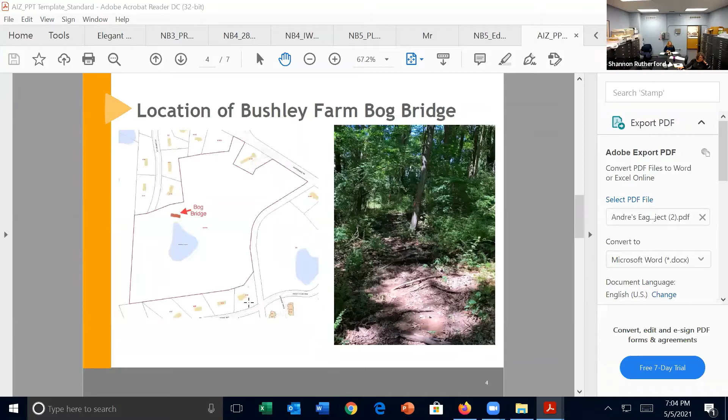That's okay. The design of the bog bridge will consist of two 2 by 12 by 12 feet long rough sawn oak planks sitting on 4 by 6 by 4 sleepers. We will be anchoring the sleepers with a rebar to prevent them from moving. The rough sawn oak may be replaced by white oak, depending on accessibility.

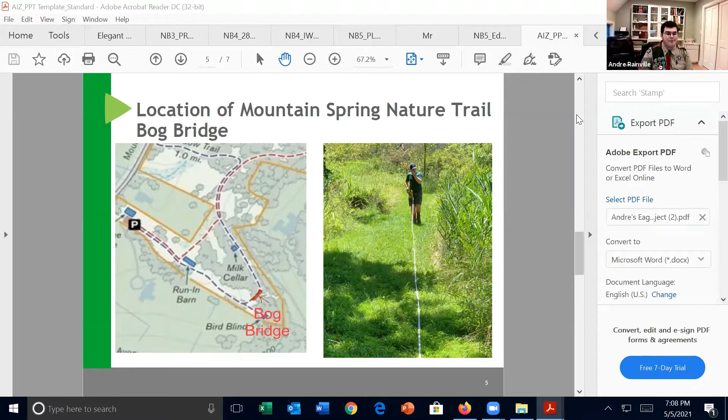Okay, Shannon, number 2, I guess, has been withdrawn. So the whole application was withdrawn? Correct. Mr. Van Voorhees is going to think about this a little more to determine what direction he really wants to go with this. And then we'll likely see him back at some point. Okay, but he has formally withdrawn. Yes, I have it in an email from him. Yep. Okay, good, thank you.

Next up, Newport Realty Group LLC, 8677 Plainville Avenue. Good evening, Mr. Chair, members of the commission. I'm Christian Hoeb on behalf of the applicant Newport Realty Group. With me this evening are Mark Lovley and Anthony Valenti, who are the principals of the applicant. Also with me are Andrew Quirk and David Lord. You'll recall that this application was accepted April 21st. Our site walk was completed just this weekend on May 1st.

Staff was incredible in requesting information back, and Andrew Quirk responded to those engineering comments of the 30th, and he's prepared further responses and answers to provide the commission with more information. So in a moment, I'm going to turn it over to Andrew Quirk, and then I presume the commission will have questions. So without any further ado, Andrew, are you there? I am. Andrew Quirk, professional engineer with Kratzert, Jones and Associates, for the record.

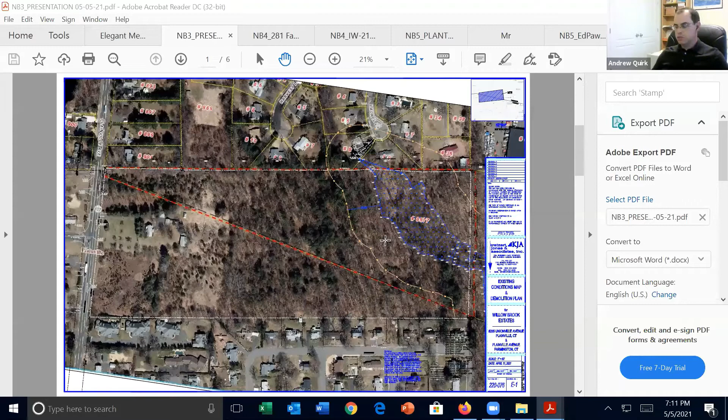to the crossing. And Shannon, maybe if we could switch to the second sheet, I think that shows the development. So that same line where we came down along the rear of those units, and we followed the berm of the detention basin. And then if we could zoom in there, Shannon, if that's possible, in that southeast corner where it overlays the contours and the open space area.

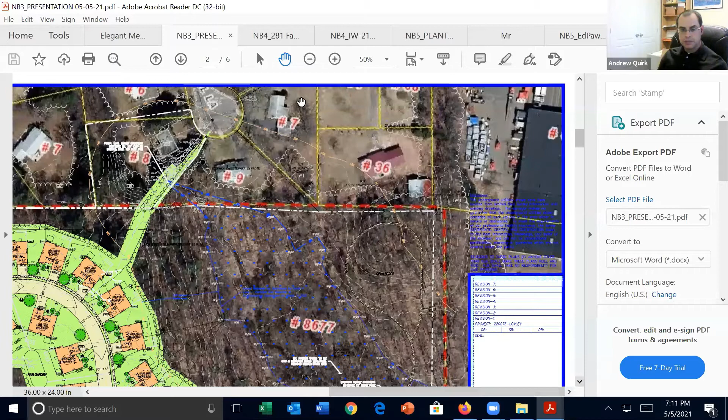I think this shows pretty well where previously we were coming directly from the detention basin going straight east. We were up near the spillway in that area. We were going straight or northeast, and we were going right down the contours in that steeper area. And instead, we're going to follow the berm and go around that knoll, following those gentle grades down to the crossing.

I think that's going to be a much better location, and that was due to the comments by Bruce here about the grades, and I think this is going to be a lot better this way. And then at the crossing, we did add to the plan some notes based on feedback that we received from the site walk at the crossing.

Unfortunately, the color doesn't show up too well on the screen, but it indicates what we discussed in the field, where we would install a 12-inch HDPE high-density polyethylene pipe, or it could be light and brought down there, and either with hand tools or small equipment like a bobcat or a mini excavator, just try to lift those

brownstones enough to slide the 12-inch pipe through, and then rest the brownstones back, and that would ensure that the flow underneath that land bridge continues should there be an issue with the brownstones, or to prevent an issue with the brownstones collapsing. Also, there were some comments about some of the debris up gradient from that crossing, some fallen trees and things that could obstruct flow.

So same thing there, we would remove the debris from the site, and anything that would obstruct the flow, some of those trees, at least move those to the side away from the flow pattern so that they don't obstruct the flow. That's the summary I have from the site walk. We did try to address many of the engineering and planning comments.

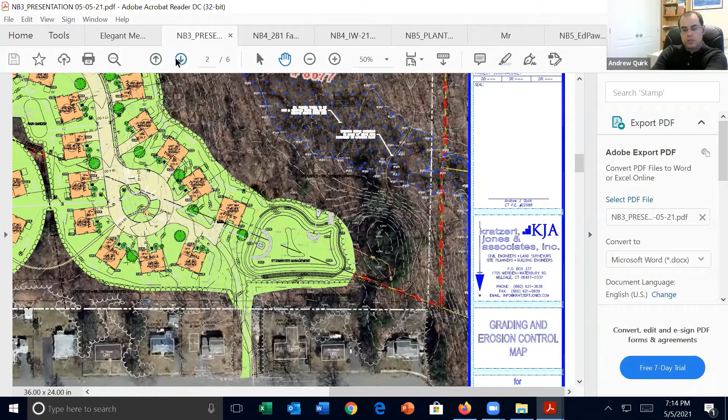Again, the permit would be for, I believe it's on the next sheet, Shannon, the 22 square feet of direct wetland impact, and the 0.7 acres of upland review area impact. I believe it's sheet 4. Yes, so the orange shaded area is that upland review area impact, with, again, generally about 1/3 of that for the sewer construction, 1/3 associated with the rear yards of the homes, and 1/3 for the stormwater basin.

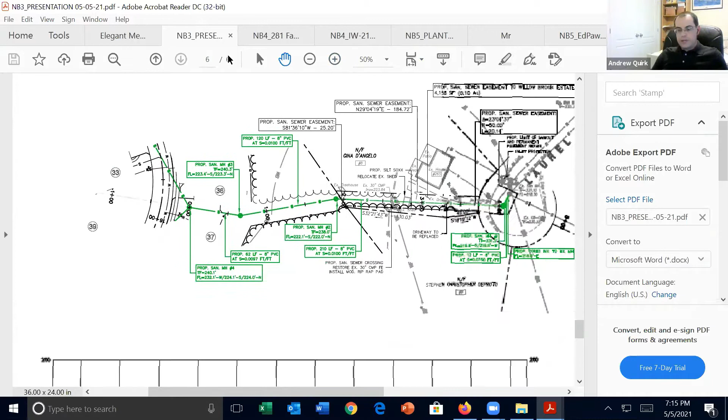And then just the 22 square feet of direct wetland impact at the end of that existing culvert where the sewer crossing comes through. We also did include, I believe it's sheet 6, a separate plan and profile with details for the sewer crossing in response to the comments. Should be, yeah, one more, page 6. So with that, I think that would conclude any presentation I would have at this time, and be happy to try to answer any questions.

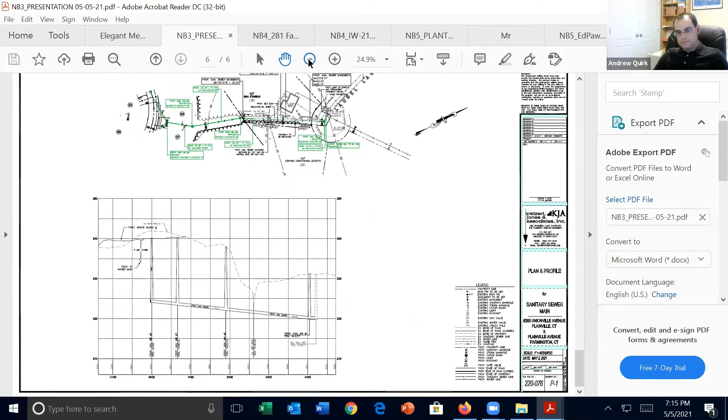Thank you. Chris, did you want Mr. Lord to make any comments, or I don't know if you want to do that to sort of consolidate your side's comments, and then we can ask questions to either of them, or how do you want to go forward with this? I don't see David Lord here, but I think he responded to any questions at the site walk, and I'm not sure he had any new information.

Is that true, Andrew? Yeah, I did receive an email from him, and unfortunately he wasn't able to make it at this time. He might be able to join in at the end, but he had a conflict. Okay. But he did submit the soils report, the impact assessment, and I don't believe he had any new information other than those items and the information from the site walk. Okay, that's fine. Then we'll go to the commission members. So Jay, I'll start with you on this one. Comments, questions?

I don't really have any specific questions other than, and I don't know exactly where this would fit in. It just occurred to me, does the open space portion of this project need to come before conservation? Maybe that's a moot question, but it occurred to me after I left Saturday.

That's the only thing I was curious about. To the Conservation Commission? Yeah. So the Inland Wetlands Commission can request that a conservation easement be placed over the, okay. And if it was, it doesn't fall under the subdivision umbrella in a traditional sense because it's a senior active adult. So it is a zoning provision. I don't believe there's a required referral back to conservation for that.

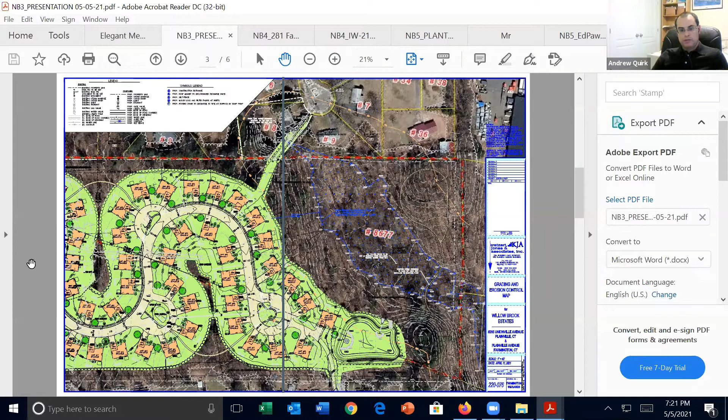So in addition to defining that line that would be open space for zoning, we could have that same area have a conservation easement in favor of the town for further protection and enforcement. That would be probably at least 100 feet from the wetlands, as part of that open space area. That could be also protected by a conservation easement. Okay.

And then where you're coming off of Laurel Lane for running the sewer line, we had discussed whether it would be a better idea to extend that pipe. The sewer line was going to run underneath the stream. So would it be better to extend that pipe, or would it be easier just to leave the pipe as is and put in a riprap pad there? Talking about the stormwater pipe, right, Ned? Stormwater, yeah, the pipe right near Laurel Lane. We were talking about it a little bit.

We had some thought about extending that pipe below, so there wouldn't be a conflict between the sewer line and the stream. You would be protected by extending the pipe. But I'm not really sure what the grade elevation differences are between the sewer and the stream. I was just wondering if they had given any more thought to that.

Sure, great question. A couple things came up through the site walk. The plan as it is now is to keep that pipe in its present location. It will be disrupted during construction, so we'll have to reset a section of pipe there at the end, and then have the riprap installed at the outfall at the current location.

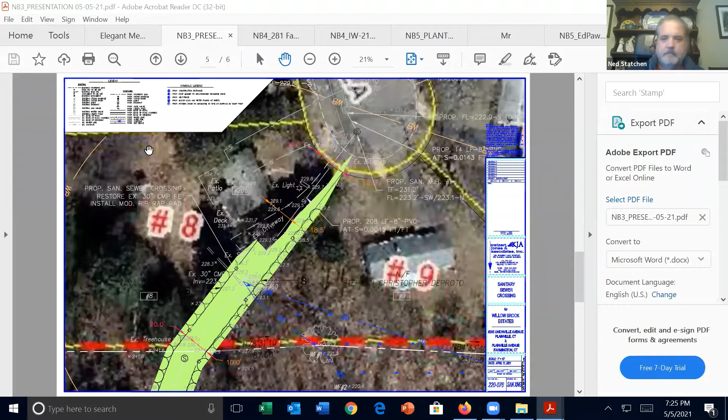So I guess it's not as if there's an extended flow over the sewer line. It's literally at the outfall location. Okay, that's fine. 3 feet of cover should be plenty. Okay, thank you. That's all I got. I think I'd like to hear what the other commissioners think about the conservation easement before maybe asking him officially. That's all I got. Thank you.

Okay, thanks. Mark? Yeah, I agree with Ned. I think the conservation area was one thing. And I agree more with Andrew, making it closer to 100 foot. My concern is this area has been undisturbed because you would have to go through somebody's yard. Now these people have access to the backyard and maybe walk around areas where they shouldn't. So some conservation area that would have medallions to signify to them this is not an area for them to wander about and stay on the trails that the project will provide.

And the other thing is, I'm glad that they're going to clear the debris around the bridge. Seems to be a little bit of silt buildup around one side of it, and maybe that will help it flow better and allow the water to flow over to the other side easier. Other than that, I'm fine with this project. Okay, thank you. Robert?

Just first, an apology to my fellow commission members. I intended to make the site walk on Saturday, and then life disruptions happened. I was not able to make it.

Shannon, I may need help on this question for the applicant. There are still some unresolved engineering department comments. Are those known by the applicant, and are there any concerns addressing any of the remaining engineering department comments? And if there is not clarity on what's outstanding, then Shannon may need to jump in. So I'll jump in to start if that's okay.

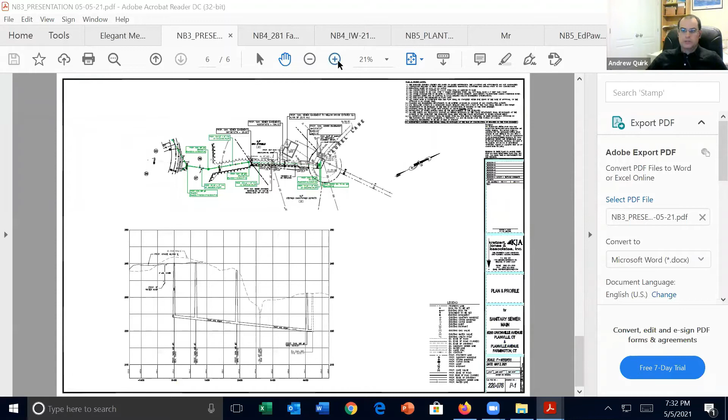And at the top portion on the plan, there's a proposed manhole at Laurel Lane, and then there's a proposed manhole to the west, right at the property line. So that section is 200 feet. So we can work between those structures pretty quickly.

We can also cap the pipe, and as part of the approval, we could limit the section for the installation right at the wetland crossing to being open for maybe a maximum of even just 3 days. It's a short section, it's shallow. They could cap the ends, stabilize it, and then deal with the rest of the construction.

I would prefer that the construction take place from Laurel Lane towards the site. We always try to connect at the down gradient location and work uphill. The intent is that the construction entrance for this will be from the site. That was one of the comments that came up from engineering, but we are not envisioning a construction entrance from Laurel Lane, but rather accessing this area from the site, working from Laurel Lane towards the site.

So once we get across that crossing, it's done. But to answer your question, we could limit that section to maybe 3 or 4 days that it's open, and it'd be capped and stabilized so that it doesn't remain open for an extended period of time. Will there be some way to bypass the runoff from a thunderstorm?

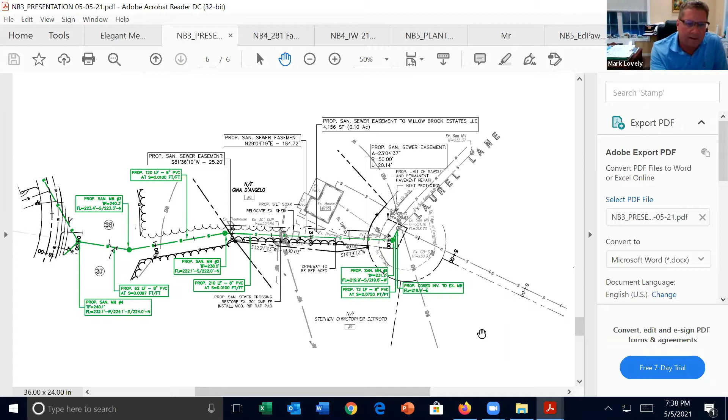So we would have the inspectors there. We would look at the weather and do it in a dry time. If we saw there was going to be rain, like we just did in Southington, we would hold off on starting that section. But our idea is to come in from Laurel Lane, get all the way from manhole to manhole in the first day, and by the next day get that back established, and then start working our way in with the construction equipment from the back end of the property instead of using Laurel Lane, so we don't disturb the neighbors.

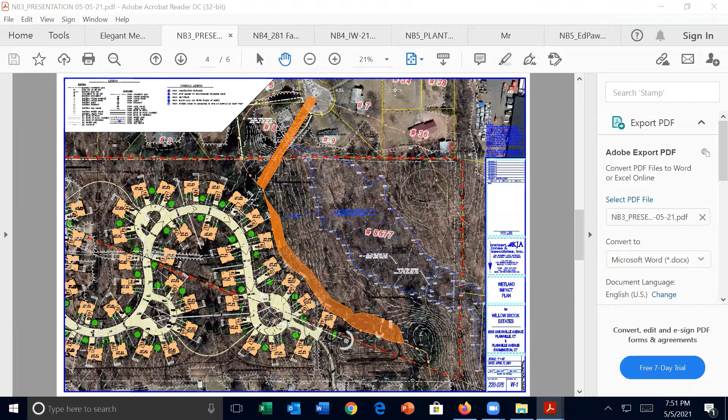I think I would be more comfortable being able to look at this a little bit more closely. The plan that we're looking at now is different than the one we had before, particularly in relation to the detention pond, addressing the engineering comments that do have a Form A, and, you know, the outfall, and they had the better mapping of the crossing that we didn't get to see. So I would prefer taking a closer look and giving them more time to more completely address the engineering comments as well.

Okay, thank you. Robert? In light of the discussion that we've had, that clearly this is a significant development of the site, while it's not a significant regulated activity or a significant impact, I think it would be prudent to allow staff a little more time to complete their comments and work with the applicant to get those fully addressed. And we also raised some issues today with drainage and stormwater management and inclusion of conservation easements. So it'd probably be better to allow some additional time to work out all of those details and act on this at our next meeting. That would be my preference. Okay, thank you. Mark?

Mark, muted? Mr. Simpson. Yes, I was. Okay. You are correct. That's why you're the chairperson. You're very knowledgeable. I agree with Robert and others who seem to have concern, and I probably would love to have more information. It is a major project, so I don't see any need at this point to, I can see we can wait and get more information if need be.

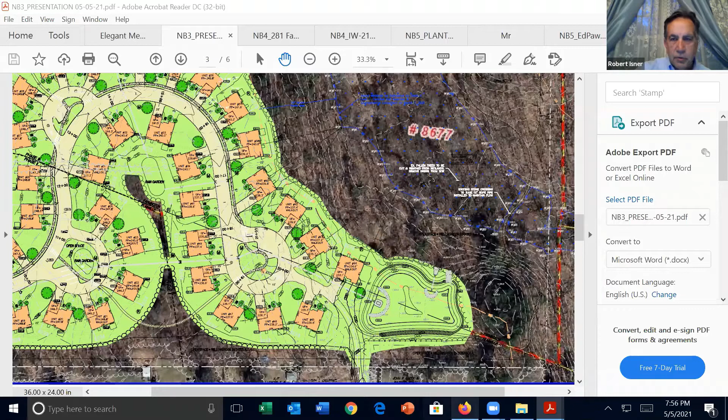And Mr. Chairman and Shannon, I would just note that there continues to be some public comment coming through chat, which, you know... Okay. I don't know how to be more clear than what we have. It's not a public hearing. The chat is not being recorded. I don't know how to be more clear about that. The commission is making the decisions based on the regulations of the Inland Wetland Commission. Understood. Just working through the chair to make sure that we're creating a level of transparency on the procedure we're using. Thank you. Certainly. And again, I think some of the issues that are being raised are not necessarily wetland issues. They may be more appropriate for planning and zoning.

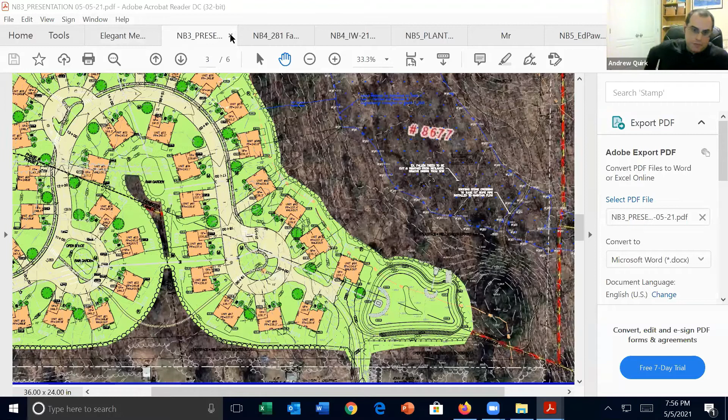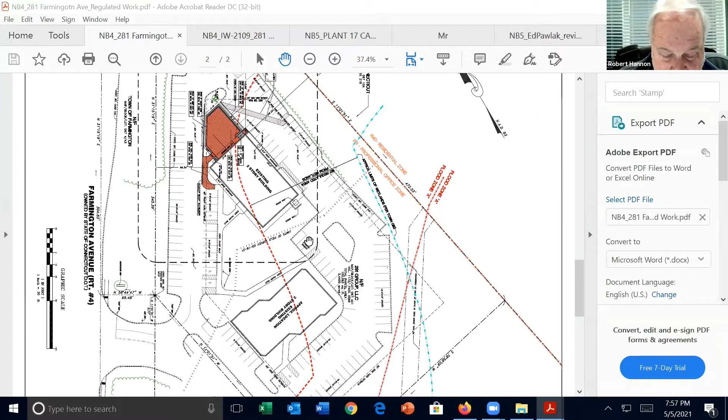Okay, next item, 10110 LLC, 281 Farmington Avenue. And this is a new application, correct, Shannon? Correct. Yes, this is the first time we're seeing this, and I believe we have Jim Cassidy on the phone to discuss the project with the commission. Yes, for the record, my name is Jim Cassidy, a professional engineer and principal with the firm of Hallisey, Pearson & Cassidy, located at 630 Main Street in Cromwell, Connecticut. Here tonight representing 10110 LLC, who is the owner of the building located at 281 Farmington Avenue.

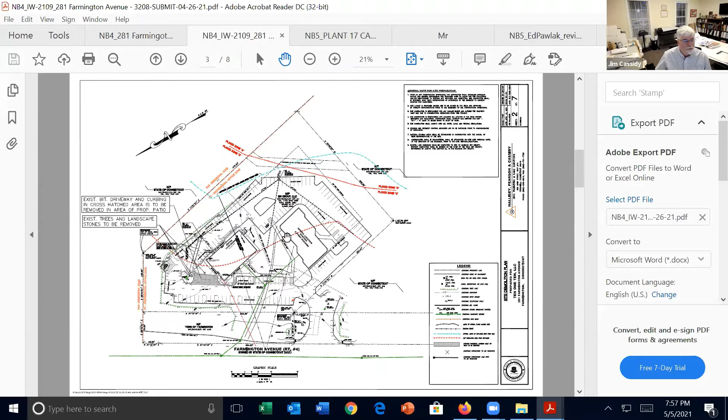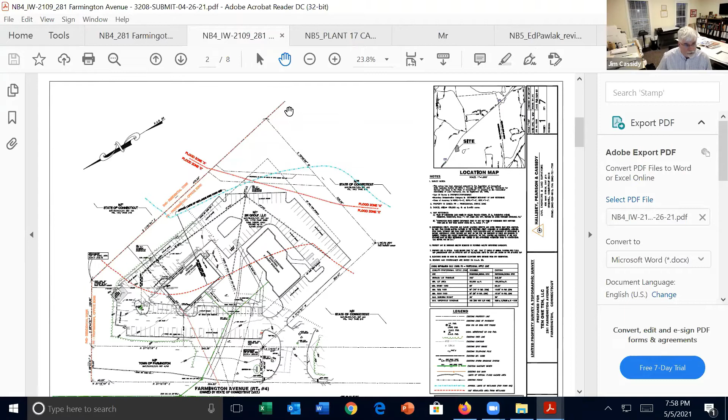Is it okay if I could share my screen, or would you prefer to keep control? No, sorry. For the public meetings, we don't do that. Sure, no problem. So the first photo you have up is actually, could you go back one page, Shannon? Yeah. Okay, so that's the title. Go back to page 2. I'm sorry. Okay. So the first plan you have up is the existing site survey that was submitted as part of our package. Technically, there are 2 buildings on the property. The property is accessed off of Farmington Avenue. To the north or to the left is going to be the entrance to UConn Health Center.

The actual driveway entering into the site is not on the property. It's on property of the State of Connecticut with a curb cut off into our site. This is access. The other building, which is on the right-hand side, is the Farmington Associates Dental Group. And the building on the left, which is the building we're talking about, is the former, I can't remember the name of the architect's office, but it's now occupied by Connecticut Wealth Management. This is the building that we are talking about.

What they would like to do, Shannon, if you can go one more page forward, is off on the left-hand side of the building. There's presently 6 parking spaces. What they would like to do is to remove those parking spaces, and within that triangular area, if you can go one more page, they would like to be able to put an outdoor seating area for clients that are coming in, have seats and basically a fire pit out in that area. Shannon, can you go one more page?

So the area shown in the, we'll call it brick color area, would be a new paver patio area that we're looking at constructing. Because of the topography out there, the front parking is higher than the rear parking. So what we'll be doing is along the north side of it, we'll be building a small retaining wall that will be extended up about 24 to 30 inches above the patio area. So it also acts as a seat wall. That seat wall will go around the entire circumference of that paver area all the way back into the building. At the back corner where the hand is now, there will be a small set of steps that will bring you from the patio down to that rear parking area.

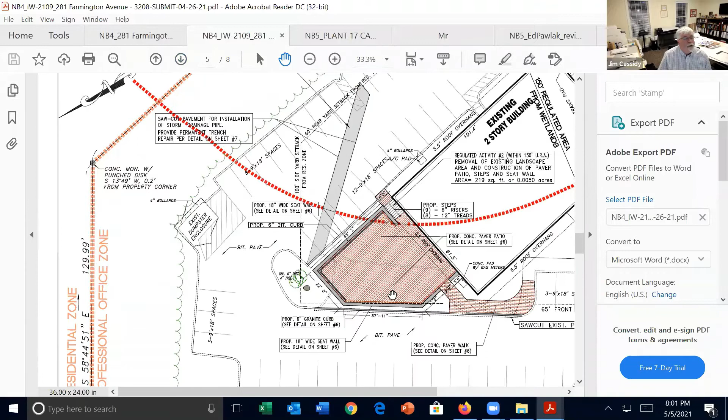In addition, the walkway in front of the building is presently a paver walkway. It ends at the parking spaces. We're going to be extending it and wrapping it around, offering access into this new paver area. To accommodate it, as I mentioned, we actually have to remove 6 parking spaces. So we're actually removing approximately 1,291 square feet of existing bituminous surface. And in its place, we'll be building the new patio, which has an area of about 1,949 square feet. So you're looking at an increase of about 700 square feet of patio area. It is going to be a paver patio. Shannon, can you go, I think, one more page down? Let's go one more page beyond that, if you can.

So the way this patio is going to be graded, it'll start level with the first floor level of the existing building. There'll be a new access way off the left side of the building into the paver area. And then the patio will be cross-pitched in basically a northwesterly direction towards that seat wall at a gradual grade of anywhere from about 1 to a max of 2%. Because the area where the hand is now, that whole perimeter of the seat wall becomes the lower spot. What we're proposing to do is put a trench drain in that area to collect any runoff from this paver patio.

Presently, the way the drainage is handled with the parking lot is there's a paved leak-off between the upper parking lot and the lower parking lot, and the water from the upper basically sheet flows across the lower and then into the catch basin that you can see on the upper portion of the screen. With the trench drain, we'd run a new pipe from the trench drain. We'd have to cut a trench into the parking lot and then tie 6-inch PVC into that catch basin to accommodate the water from the patio area. We'd also be installing a new curb, continuing the granite curb along where the former parking spaces were. And then the runoff from the front upper parking area would follow along that curb around the corner island, then continue into the catch basin at the back.

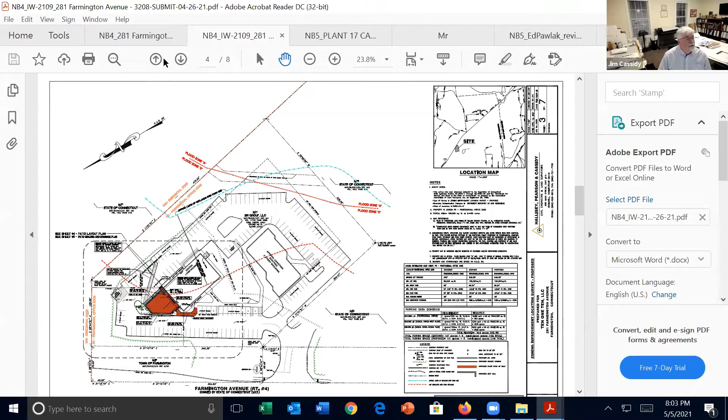The first activity you're seeing would be the trenching for the pipe. And I believe that area worked out to be about 359 square feet in total. In addition to, Shannon, if you can go back a couple pages, it's blown up a little bit more, so it's easier to read. Yeah, so I'm sorry, the trench within the regulated area is actually 366 square feet.

And then the other activity would be the creation of the corner of the patio and the stair and a little walkway that goes down to the lower parking area, which has an activity of about 219 square feet. Again, most of this activity is an existing disturbed area. It's an existing paved parking lot.

The way we were looking at this is we were actually removing about 1,291 square feet of what I'll call, I don't want to call it dirty pavement, but pavement that cars would be parking on. It would be maintained in the winters with salts and possibly have vehicles that park there that could be dripping fluids. So that area of pavement would be removed.

The new patio that would be constructed, again, having an area of about 1,949 square feet, would be an area of what we call a clean surface, whereas it's not maintained in the winter. During the winter months, they would not be using this area, no vehicles parked on it. And therefore, there'd be no winter protection or application of salts in this area. So we saw it as an enhancement of the area and reducing the amount of actual car parking pavement for this proposal.

In addition to, the one thing that we really don't address on this plan is erosion and sediment control. The overall activity disturbance is very minor. It's less than 5,000 square feet between the walk and the trenching and everything.

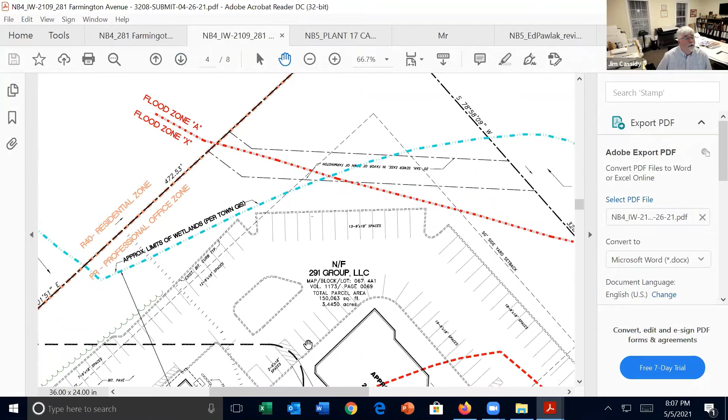When we develop it, we're going to create a new curb along the edge of the patio area. Therefore, the water that's running from those parking spaces along Farmington Avenue would follow down along the curb line. We check the grade along the whole way. There's adequate grade to make sure the water continues to flow all the way down there. So that cross-hatched area is pavement that's being removed. Okay. So the water's going to still flow in the same direction, still get to the same catch basin. The only thing is you have about 1,250 square feet less of paved parking area.

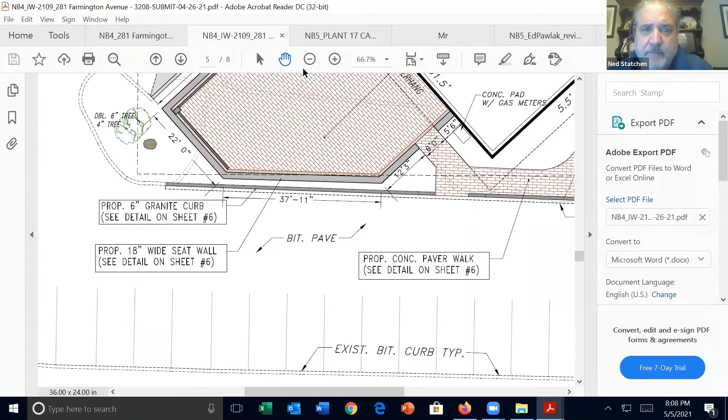Okay, and is the new pipe you're installing, is that a straight pipe or is that a perforated pipe? It'd be a straight pipe. It'd be a rigid PVC pipe. Okay. All right, that's all I have. Thank you. Thanks. Mark? No questions at this time. Robert? Questions? Dave?

Yeah, it's very little work being done within the regulated area. I noticed the staff comments had talked about maybe thinking about pervious pavers for that patio.

Is there going to be any? So yes, I could address that. A couple things. The primary soil type out there is a Branford silt loam. It doesn't have a high infiltration rate. So for that reason, and also to consider, basically what happens here is you have a retaining wall built around the entire thing. I don't think you're going to get a lot of infiltration out of it.

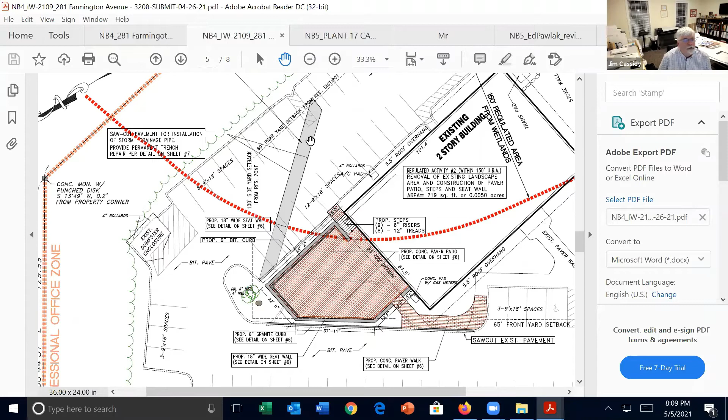Again, I thought this overall project was going to be a benefit to the existing condition. You know, it's always good to get rid of parking areas. I know it's impervious coverage, but it's what we call a clean surface because it doesn't need to be maintained, doesn't have the application of salt during the winter time. It would be the preference not to do pervious pavers in this area, just for ease of maintenance for the tenants of the building. Okay, I guess that makes sense. Everything is walled off. Okay, thank you.

Okay. Emily? I have nothing at this time. Rich? No questions. Okay, so I think the first thing we need to do is, can I get a motion to accept the application? So moved, Statchen. Is there a second? Second, Mark. Thank you. So we have a motion to accept the application. Those in favor of accepting the application, please signify by saying aye. Aye. Aye. Opposed, abstaining. Okay, so the application is accepted.

I'll toss out my comment first. I don't particularly think that a site walk is necessary for this. The site is pretty well developed. They're just redoing a certain portion of it that happens to fall within the 150-foot setback area. So my take would be, I'm not particularly interested in doing a site walk. But Rich? No, no, I don't think we need a site walk here.

Okay. Emily? I definitely do not. Dave? Yeah, no need. Robert? No need. Mark? No need for a walk. Ned? No need. Jay? No need. The only reason I was even thinking about it is just whenever I hear about tree removal, it kind of gets my hackles up a little bit. But I think it's pretty insignificant, and I don't think we need to do a site walk.

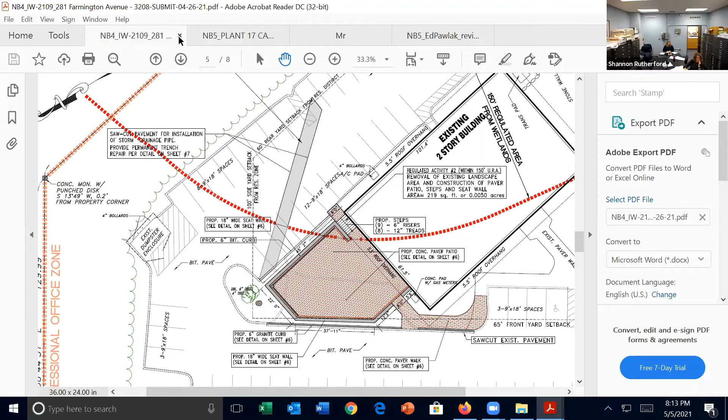Okay, and we actually get to the next item when people are still relatively awake. Yeah, kind of refreshing for a change, huh?

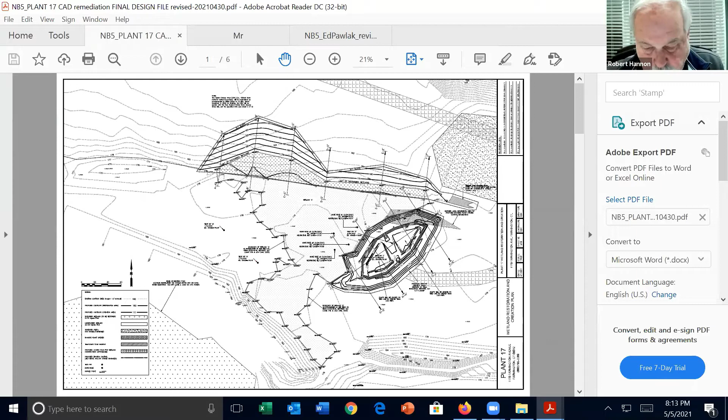Yes, it is. So next item is show cause hearing 1179 Farmington Avenue. How do we want to approach this one, Shannon? Because I know there's some additional paperwork that's come in. People have made comments. It seems as though the professionals are pretty much in agreement. So I think we've closed the gap significantly. Unfortunately, George is triple booked this evening, so he cannot be on the phone, but Attorney Galsky, Ed, is.

I apologize because this week's been a little more hectic than average for me, but I believe I got this letter from George Logan responding to Ed's review letter of April 21st out to everyone. And Ed's review letter of Monday of this final plan was emailed out to everyone at the end of last week with the agenda review. And I believe Ed had an opportunity to see George's response.

Bruce and I had done a site walk, I'm going to say last week at this point. I've lost track of my days. So last week or the week before with Stanley and Bill out at the property, and gave the green light just for a few things with respect to reinforcing erosion control and getting some protection around the wetland, the standing ponding area.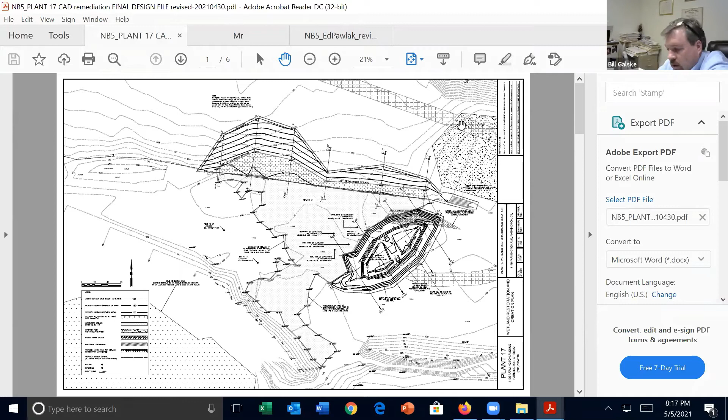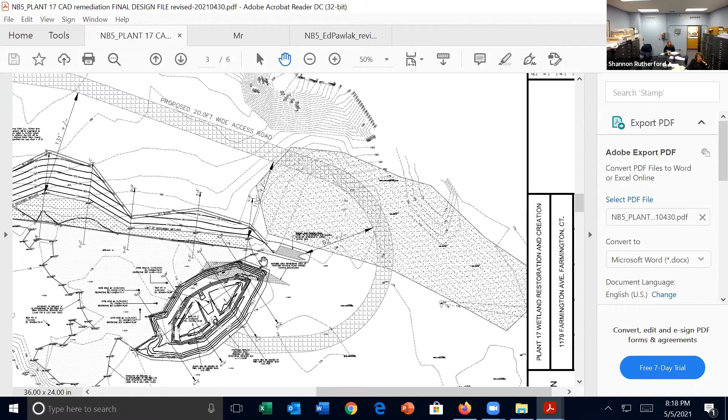Is that this representation here, Attorney Galske? Yeah, this is the access to come around, right? And Shannon's with me now. So it comes off the edge of the, it's coming off here, the edge of the page. Here we go. Okay, I'm getting the full. So that'll be the access road for working. So we're not cutting through wetland A, and there's also protection of this ponding area that currently has the tadpoles. And we're going to screen that off with the erosion measures as well. Right. Okay.

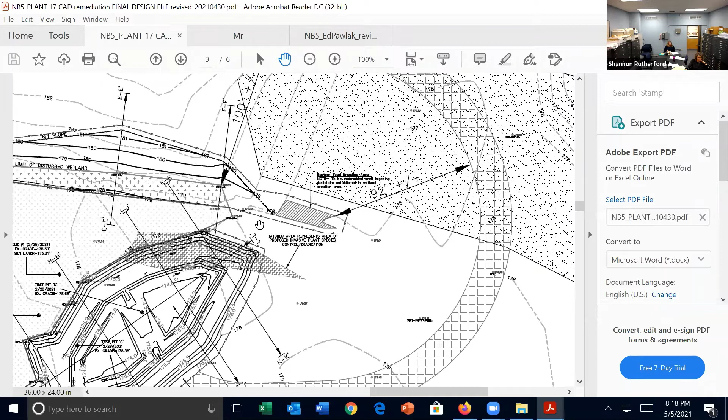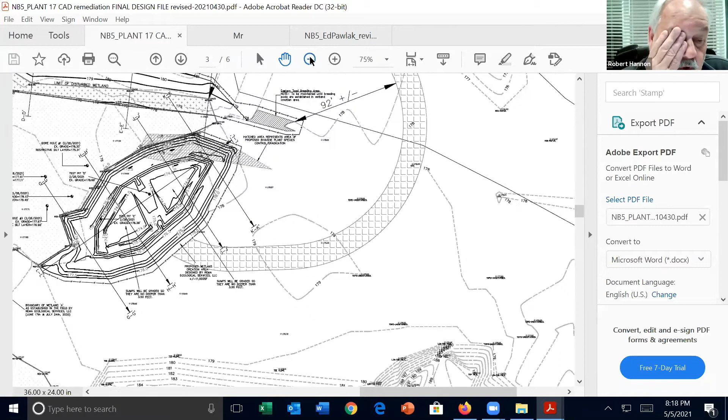Yeah, because I think one of the issues that we're starting to get into is if the goal is to try to get started on this and get this work in the ground, we don't want to be waiting another couple of months. We start getting into the dry season. So I think that's part of the reason why we're talking about trying to see if we could get this buttoned up for today. So I guess, okay, but before I go on to some of the commission members, Ed, do you have any comments on this?

Can you hear me, folks? Yes, we can. Great. For the record, Ed Pawlak, soil scientist with Connecticut Ecosystems, consultant for the commission. Yes, I wrote a review letter dated May 3rd, in which I reviewed the revised site plan set of 6 sheets, as well as George Logan's April 29th letter. And I can go very quickly through my comments. I do note that REMA has accepted all of the recommendations that I made in my earlier letter of April 21st. So that's great. That really, as Shannon said, bridged the gap that existed between myself and REMA.

But I do note at item number 1, and Shannon had that area up on the screen just a little bit ago, a flooded area to the east, kind of northeast of wetland A. That's it right there. Shannon is hovering over it. It's an area that's shaded in. That area, if you recall, is a depressional area. It appears that it was excavated as part of the overall earthwork on the property last year, perhaps to draw water away from the working area. But it's remained kind of an enigma, problematic, because I've seen it holding quite a bit of water, as well as mostly dry last year.

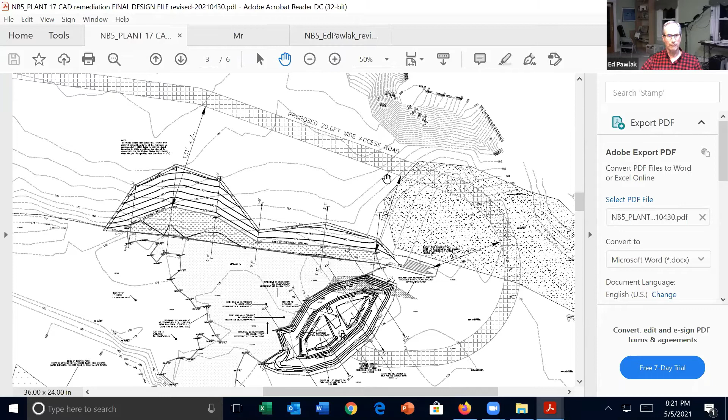And it's serving this spring as a breeding site for American toads. It may be the only area on the site where toads have been breeding so far, according to what I've heard. So I make the point in number 1 that the applicant not fill this area. There is language in the REMA letter about filling it or eliminating it once the function's been replicated in the wetland creation area.

But I make the point, the reminder that any filling of that depressional area really should come in front of the commission. Determination should be made if it is an intermittent watercourse, and if so, whether a permit is required. But until such time that it's determined to not be a regulated area, I think it's safe to assume that it is. And certainly it's an important area now because it is serving as breeding habitat for American

toads. I think Shannon may have answered the question I posed in number 2. I asked if there was any eastern toad breeding observed in the central portion of wetland A. She said no. Also that there was no breeding observed yet in the northern lobe of wetland B off to the west, right there. So that kind of makes that area that I was just discussing in item number 1 maybe even more important. That's where the toads are breeding this spring.

So, unless there's a compelling argument and there's no feasible and prudent alternative to eliminating it, I don't see any reason to eliminate it. It's proximate to wetland A. It'll be proximate to the wetland creation area just to the southwest. I see no compelling argument for filling it. It's not out in the middle of the field as an isolated wetland. It's actually very close to these other resources. So certainly want to keep our eyes on that and certainly not have it filled.

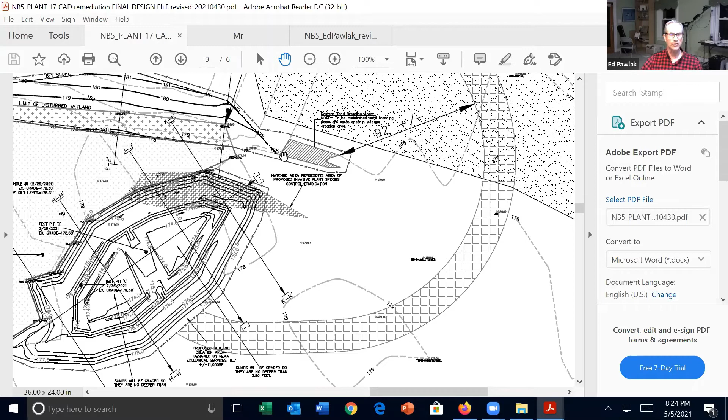That wetland B, which Shannon was just highlighting on this sheet just off to the west, it's not labeled on this sheet. And just for the purposes of clarity, I recommended that be labeled, as well as to the west of that, Shannon, if you go just a little further to the left, to the west, there we are, that's sort of that crescent-shaped flooded area. That's not been delineated yet, but it should be identified on the map as a flooded area. And once again, should not be eliminated until it's been determined whether toads are breeding there and whether it's been replicated elsewhere.

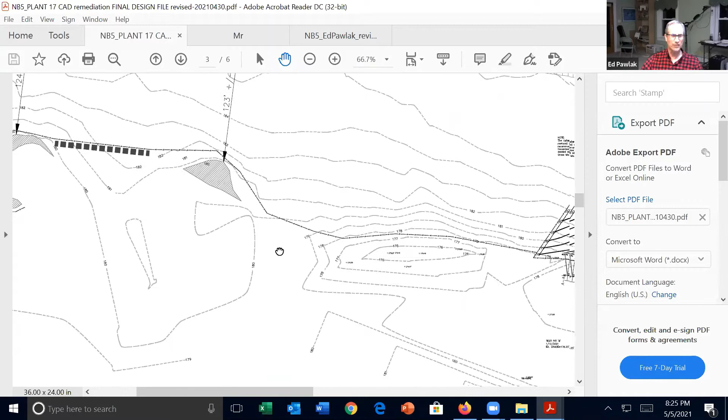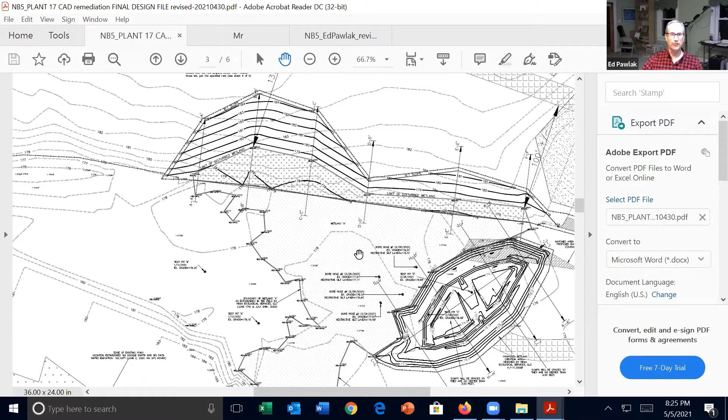In item number 6, I recommended that the limits of the upland review area around wetland A be demarcated out in the field, I recommended with wooden posts with medallions or something similar, just something to permanently mark out in the field the limits of the upland review area so that there's no inadvertent... actually, further to the north, 150 feet. Sorry, I thought you said wetland A, but you're saying the upland review area. Got it. Yeah, right, which is not shown right now, I don't think, on that plan. But the limits of that upland review area should be demarcated. Last year there was filling in that area. You don't want to see that happen again. It's much less likely to happen if the limit of that regulated area is demarcated out in the field.

Item number 7, I asked the question of what is the material from which that temporary access road will be constructed and what will be its status after the wetland is installed. I imagine it will be removed and restored, but I think you want to have that in writing.

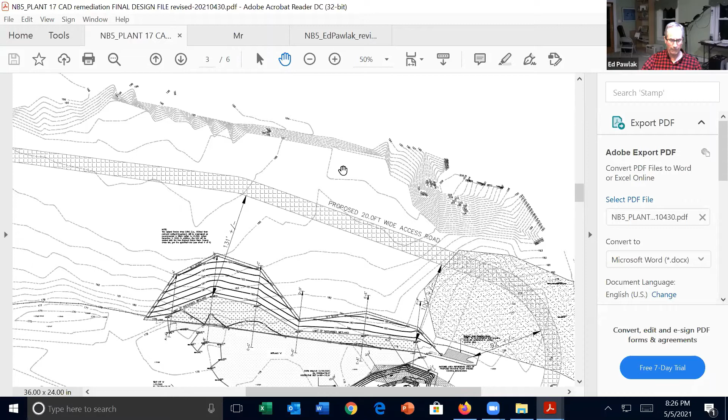Item number 8, under staff comments in the REMA letter, they note that the entire open field, which is kind of shown on the screen right now, will be fertilized in accordance with the recommendations from the UConn soil lab test. And that's contained in an earlier REMA letter, but it's not found in this site plan. Or I guess there it is. It's in that letter, which is on sheet 6, I believe, of that site plan set. But it can kind of be buried in there. I'd like to see that labeled on that sheet that contains the upland review area, just so there's no question that that area will be treated with fertilizers as recommended.

And finally, number 9, I piggyback the comments of the commission that the window for doing this work is going to be closing pretty soon. Right now is an optimal time. You have a high water table.

You have, you know, sort of a fair amount of precipitation, but that's going to go away once we get into summer. So really, the time to act is now. I think everybody's come together over a period of months, a lot of hard work, but a lot of compromises have been made. I think a good plan has been arrived at, and I'm anxious to see that work begin as soon as possible. Thank you. Okay, thanks.

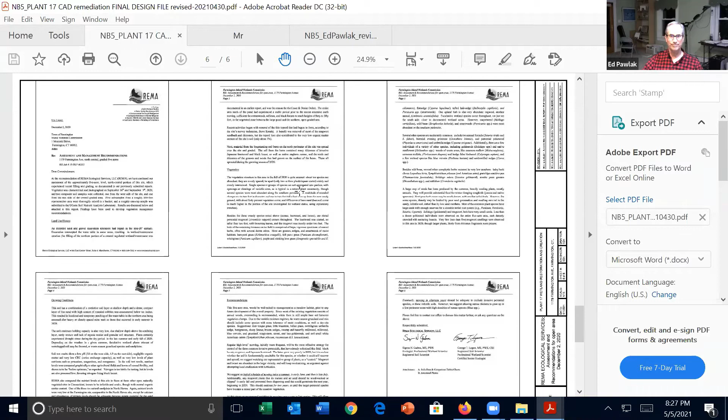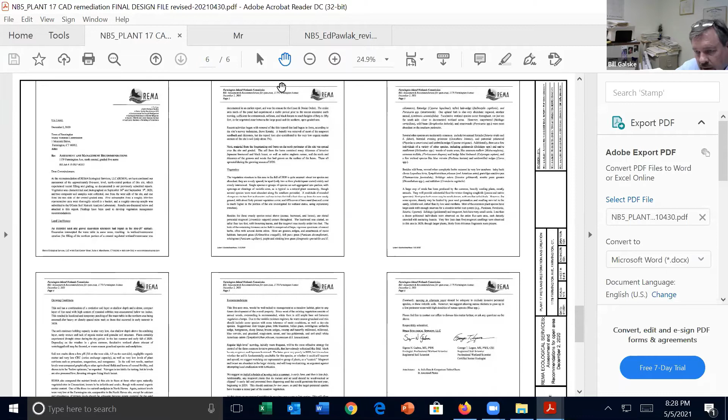Attorney Galske, you have any comments? You want to follow up on that? I think the only comment might be to the composition of the work road, and Stanley's with me here. I think that would just remain dirt for now, because it's going to be a very short period of construction in there, and it'll provide access to get in there and to seed and to water the field as needed. So we're not proposing to put any stone tracking pad or anything like that down at all. A lot of it's been compacted already. It was compacted last year.

So I think it's possible to seed that. I wouldn't want to see that just remain as a dirt road. I'd like to see that vegetated. Oh yeah, once the work and the remediation work has been done, then it would be, sure. Okay, good.

When we were out in the field last week, we had talked about it maybe being further to the west where the old haul road was, but it's been moved to the east more. Probably about 75, 80 feet from where the old haul road was. Is that north going up? Yeah, north. That's okay. It was moved further away from wetland A and the slope work than what we discussed. We had talked about hugging it in here closer, but this provides a nice straight line and keeps a nice distance away from all the regulated areas. Agreed.

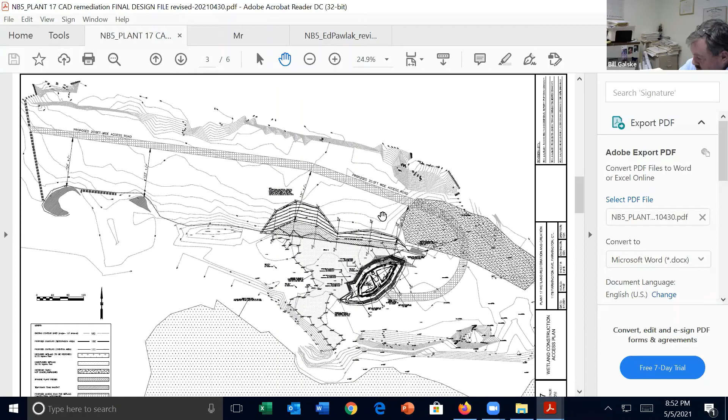Okay. That's the end of new business. Planner's report. Woohoo! Before 9 o'clock. The only thing I can think of at the moment that I have for you folks is just to let everyone know. I think those that were on the site walk are aware, but we received an appeal to the decision to the 402 Farmington Ave LLC from both the Fitchmans and the Zatujans. So 2 appeals were filed. They came in, I say last Wednesday, I believe I was served papers.

So they've been, excuse me? You signed them. I did sign them. Yes. Yeah, I did. I couldn't run away from the clerk. I was kind of cornered. So, so they obviously. We'll visit you in jail. Thank you. I don't think I'm being incarcerated for this. He's not the one that's in the hot seat. That'd be a site visit. The rest sounds absolutely delightful. So maybe, you know, just take me. At any rate, does that qualify as a site walk or site visit? We're going to start a GoFundMe account for you, Shannon. Let the record reflect Shannon was only working at the direction of the commission and under the protection of our regulations. Oh, so we're all going to jail. Great. Or at least the chair might. At any rate, I have confidence. My goodness, we're all a little loopy.

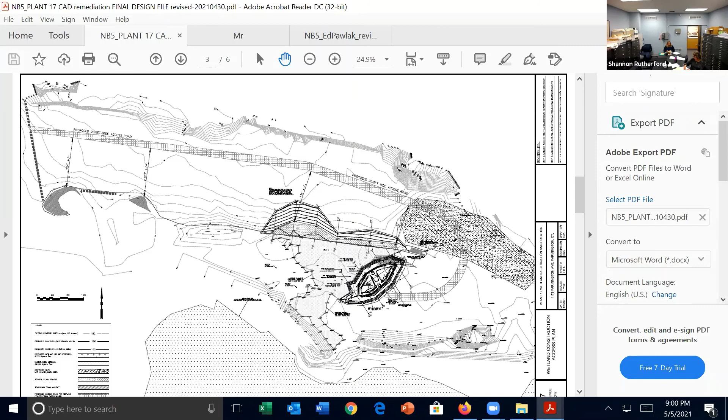The green efforts, the cleanup day, 1,900 pounds. So almost a ton, which is a little light, but given current circumstances, it's actually really good. It's about anywhere from 600 to 1,000 pounds less than what they historically do. But really a great effort, again, given current circumstances.

And the electronics recycling was also completely out of this world. We don't have the weights yet, but the Green Monster had to make 5 trips with their box trucks back and forth. Apparently everybody bought new HD TVs and widescreen televisions because there were more televisions than they've ever seen.

Well, I can vouch for almost hurting 2 older men, I'm assuming fathers of some of the kids playing on the football team, that took this big old TV out of the back of our car and tried to lift it up to put it into a box. Oh my gosh. I give them a whole lot of credit for that. I wouldn't have done it. No. My son was there. He's on the football team and he was moving electronics. Yep. Yeah.

I got there a little before 8, maybe about 7:45, 20 of 8. There were already a lot of cars in line, both for household hazardous waste and for the electronics. So yeah, it was pretty busy. It was definitely a busy day. So we'll get more of the other numbers as they start to come through, and I'll share them.

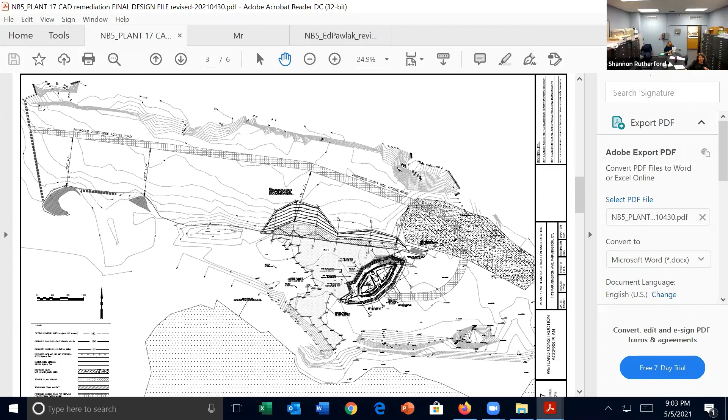So can I get a motion to approve the minutes of April 21st, 2021 for the Conservation Commission meeting? So moved, Statchen. Is there a second? Oh, Robert, second. Were you seconding? Well, yeah, I seconded, but I also have a comment once we're done with the motion. Okay. So you have a question, comment on the minutes? No, it's a sidebar. Okay. So those in favor of approving the minutes of April 21st, 2021 for the Conservation Commission meeting, please signify by saying aye. Aye. Aye. Opposed? Abstaining? So it carries.